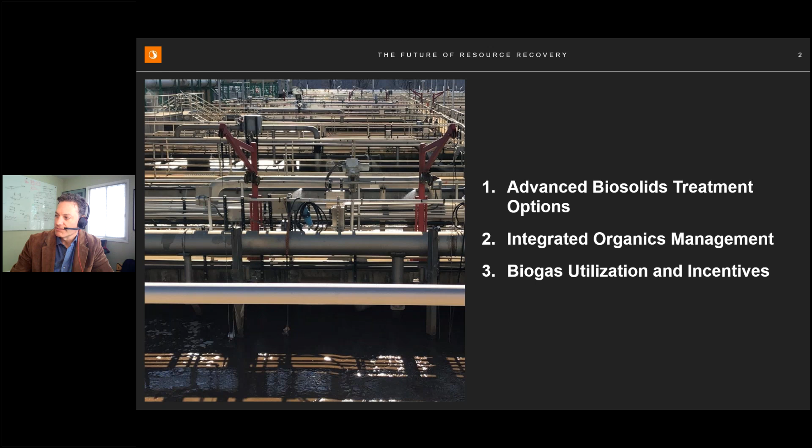I'll be presenting the first half of the presentation, and the topics I'll be covering include advanced biosolids treatment options, and then integrated organics management and biogas utilization and incentives market.

So I want to start off with some common objectives that we're seeing throughout our work on master planning and facility planning with utilities in North America and globally. One of those coincides with the topic of today's presentation: maximizing resource recovery.

And within the context of maximizing resource recovery, achieving Class A options and looking for diversified biosolids end-use options for sustainability. Many of these utilities that you all operate are decades old at this point.

There have been regulatory changes, capacity constraints, and many modifications have happened over the decades, and therefore there are space constraints, which is a common issue at these facilities. So trying to find space for new assets is typically challenging.

There's always the objective of ensuring that the end use, the effluent, is achieving the plan's effluent compliance, and ensuring there's an understanding of how the solid stream is impacting the liquid stream. Within that context, oftentimes we're looking at side stream treatment options to mitigate those impacts and ensure that effluent limits are complied with and the system is as efficient as possible.

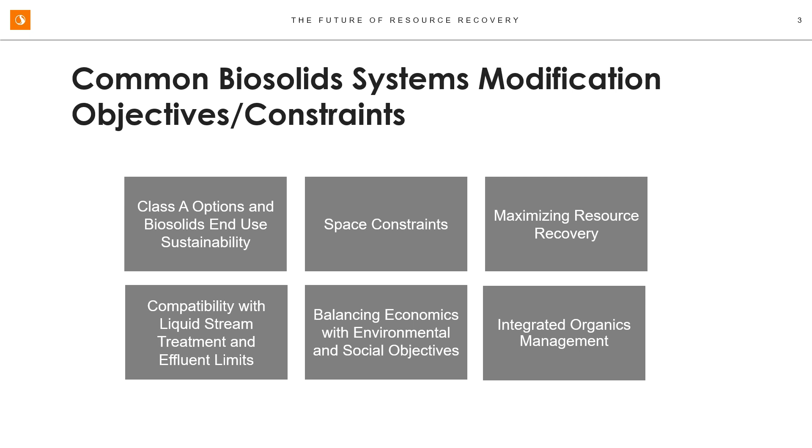In addition to that, looking at the green waste that can be combined downstream for bulking agent and so forth, for maximizing recovery of all organics.

About 12 years ago, I was involved in a Water Research Foundation study called 05-CTS-3 for waste solids reduction. At that time, there was a really healthy market in pretreatment technologies looking at ways of ensuring that we can minimize the waste activated sludge and overall sludge volume by hydrolyzing material upstream. In that competitive market, many of those technologies have survived, and some of them have waned a bit.

What's really come to the surface over the last few years in those pretreatment technologies is thermal hydrolysis technologies and thermochemical hydrolysis technologies like thermal alkaline treatment. All of the advanced anaerobic digestion technologies we're still seeing in play for various drivers, including thermophilic digestion, biological hydrolysis or acid gas phase digestion, post-aerobic digestion, and a lot of interest that I'll get into more here later on high solids anaerobic digestion, that is, intensification processes.

We're also looking at combination processes, like combining anaerobic digestion with thermal drying, composting, and thermal alkaline treatment downstream, which has become popular. We're seeing incineration processes still used and combined with anaerobic digestion. Post-thermal hydrolysis is something Cambi is working on now, along with emerging technologies like pyrolysis and gasification.

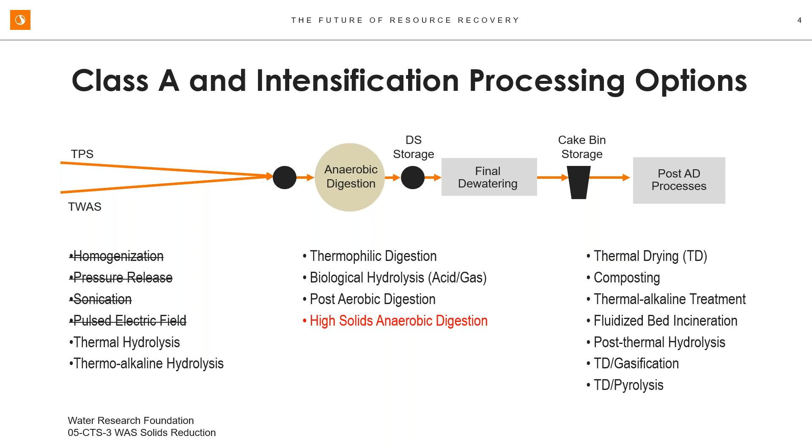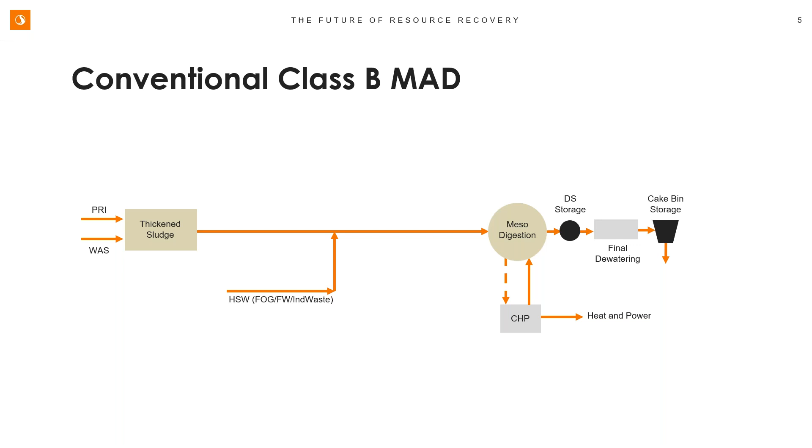Typically, a screening system is put in—a 6 millimeter screen or smaller—to get debris out of the sludge. A pre-dewatering step is required to get the sludge somewhere between 15 and 18% solids going into the thermal hydrolysis, to optimize the heat balance within that system.

Downstream of the thermal hydrolysis process, dilution water is added to ensure the TKN entering the digester is at an appropriate concentration to control the amount of ammonia in the digester itself. There's also a cooling step required—typically around 100 degrees Fahrenheit needs to be dropped from the system even after the dilution water is added.

The biogas can be used in a number of different ways, but if it's a combined heat and power system, the heat recovered needs to be converted to steam through a heat recovery steam generator to provide heat to the thermal hydrolysis system itself. This could require some supplemental fuel, depending on the type of CHP system and the overall heat demand.

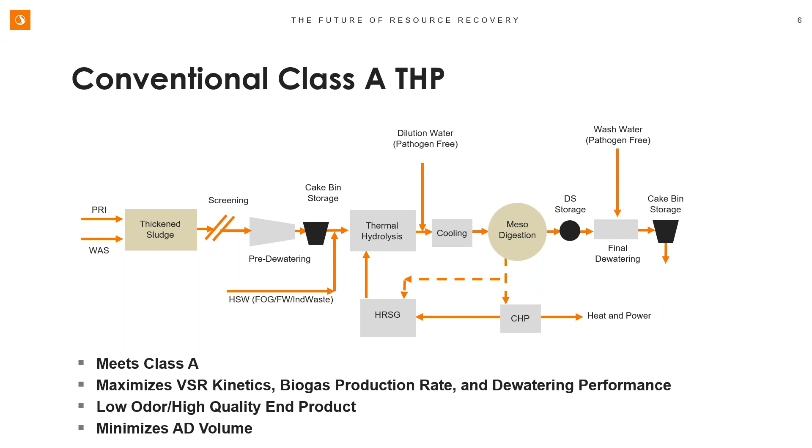The rate of biogas production is increased, and dewatering performance is significantly improved. We usually get somewhere around 28 to 30% dry solids from these systems, and the quality of the cake is very high—low odor and a very friable product. So it's a great process, but there's a lot going on with it.

As an intermediate step towards thermal hydrolysis, many facilities are simply looking at maintaining a Class B approach to biosolids management, but getting more out of the digestion system through intensification via high solids anaerobic digestion processes—taking the solids typically from 3 to 4% feed concentration up to 6 to 8%.

That can be done quite easily upstream, but sometimes you run into a viscosity issue getting that sludge into the digestion system itself. Chemical addition can be used to manage that. As I mentioned before, the alkalinity used in some of these processes does a nice job of reducing viscosity and potentially providing a hydrolyzing element to the process upstream. So that's one way to manage viscosity.

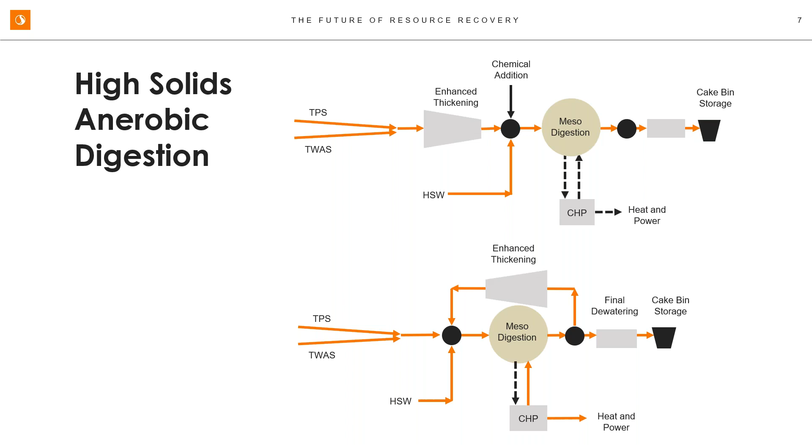Another way is through recuperative thickening, where you essentially decouple the solids retention time from the hydraulic retention time—recovering some of the digested solids, sending it through a thickening process, typically centrifuges, and back into the digester so you retain the solids. A nice aspect is you get a bit of a TKN ammonia purge out of that, so you can maintain a lower TKN concentration within the digestion system to avoid toxicity or inhibition.

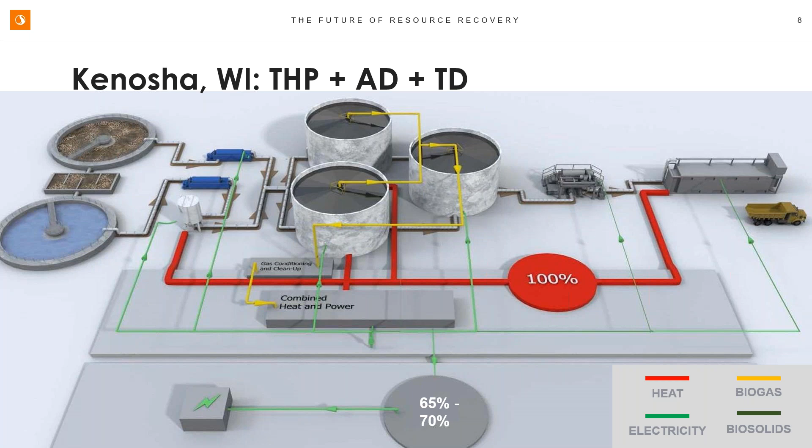Another project I was involved in several years ago is the Green Bay, Wisconsin R2E2 process, which includes anaerobic digestion, partial thermal drying, and fluidized bed incineration.

In this process, it's a heavy co-digestion system where imported industrial organic waste is combined with primary sludge, and thickened waste activated sludge goes to the anaerobic digestion system, then into a dewatering system. From the anaerobic digestion system, biogas goes to CHP for heat and power production, and the dewatered solids go to a thermal dryer. The thermal dryer recovers heat and supplies it to a pre-drying system to achieve autogenous combustion in the fluidized bed incinerator.

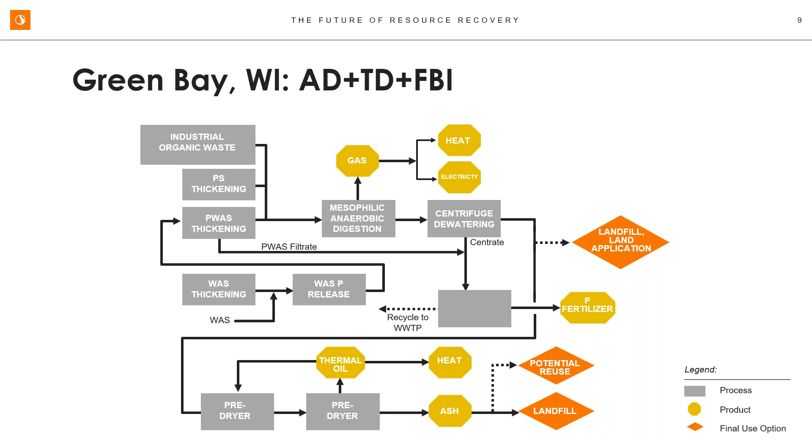It's a really innovative process. I'm impressed with that client and what they've done there.

This is an image of that facility. I was in charge of the pre-design of the anaerobic digesters you see on the right, and these are really state-of-the-art anaerobic digestion systems. They're silo-shaped units with a very high height to diameter ratio and a cone-shaped bottom, optimized for energy demand as well as energy production, and can be kept in service for a long period of time based on the shape, which keeps grit out of them.

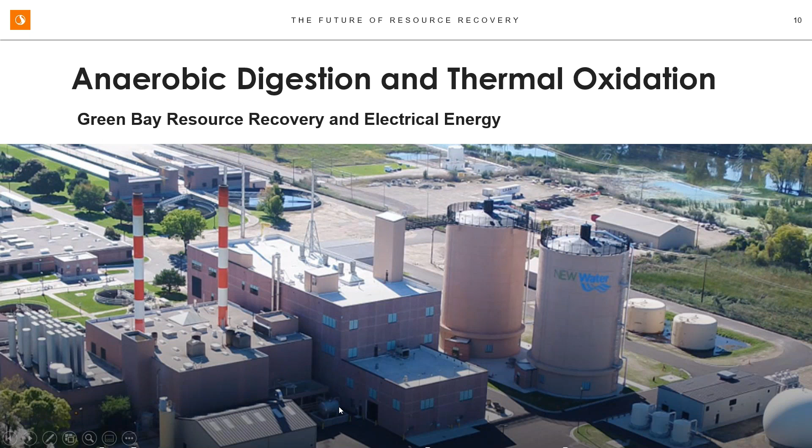In the center part of the diagram, you'll see the fluidized bed incineration system and the solids handling system itself.

Switching over to integrated organics management, as I said, there is a very strong trend in this. Some of it's regulatory driven, where, for example, in the state of California, for landfill diversion requirements, we're seeing a lot of co-digestion work going on in urban areas where landfill costs are becoming high, and the goals for renewable energy production as well as greenhouse gas reduction are driving this.

It's really the next step into the future of resource recovery, as far as I'm concerned, for facilities, municipalities, agencies, and districts that are looking to continue to improve on their resource recovery aspects.

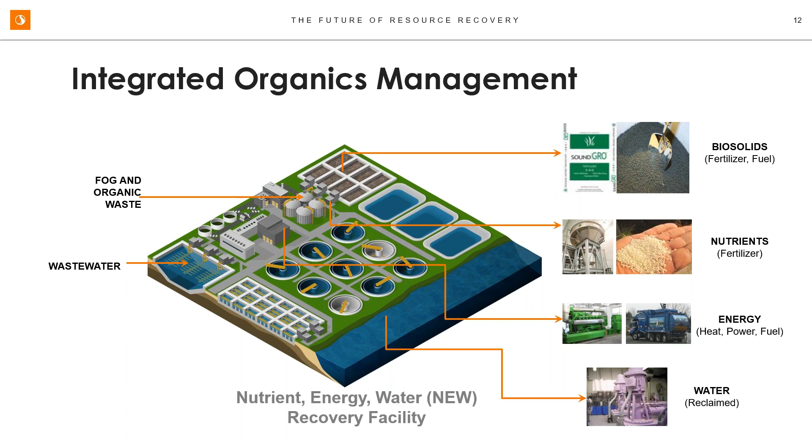Of course, this refinery in the middle is producing products at the end that include biosolids, nutrient recovery for fertilizer, energy production for vehicle and power production, as well as water recovery.

I've got several images here of these systems, and now what we're seeing is the evolution where pre-treatment systems for food waste are happening at material recovery facilities, really separate from the treatment facility. This is one example, I'd say a 1.0 version, of a separation magnetic metal removal system and screening system at the Central Marin Sanitation Agency.

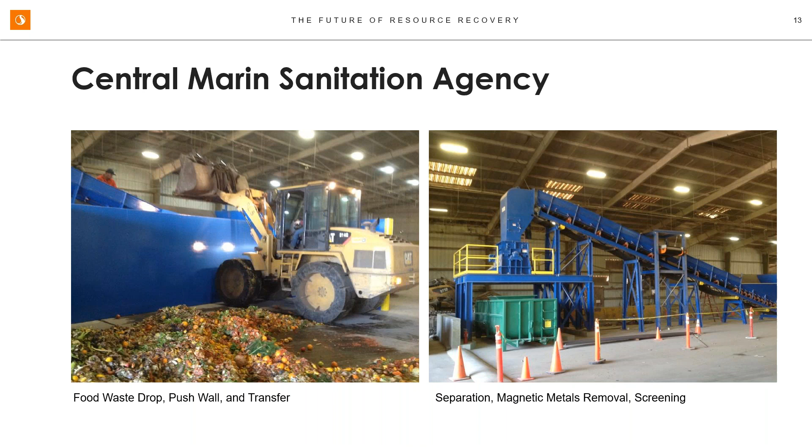It's just down the street from the treatment facility, so all the pre-processing of the material happens at this facility, and then it's transferred just down the street and injected into the anaerobic digestion system there.

This is another good example, the LA County Sanitation District in California. They have worked with third-party providers, but this particular system is something that LA County owns and operates themselves.

It's a screening system that has a series of sequential finer screens that create this bioslurry that you see over on the right.

The screening system is in the image on the left, and there are storage tanks from which the bioslurry is pumped into tanker trucks, and from the tanker trucks, that's transferred over to the treatment facility where it's co-digested with wastewater residuals.

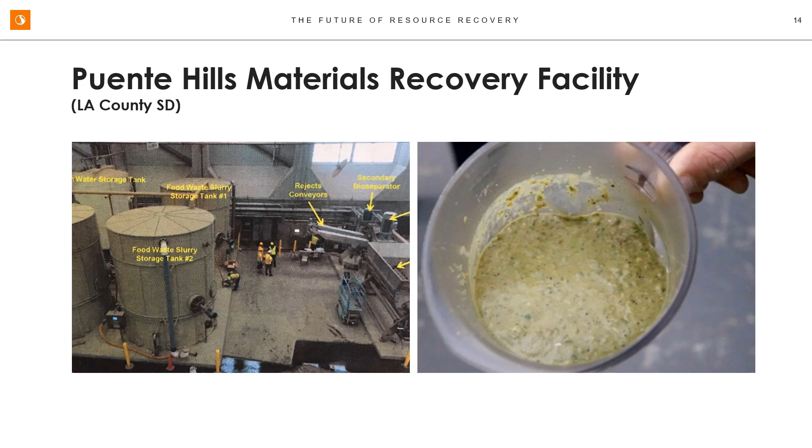The city of Edmonton has really been out ahead of this for a long period of time, and Stantec has had the pleasure of working with them on many projects, including one recently where we're the owner's agent on a wet digestion system, as they call it, which essentially includes...

a conventional digester as the wastewater market would see it, but it's for food waste or separated organic food waste that will be anaerobically digested. The biogas is planned to be used in a renewable natural gas system there, and residuals will be dewatered and reused in various aspects there.

It's a very nice system, and this shows images of their existing system with a dry anaerobic digestion system, combined heat and power, and the biogas storage and percolate recovery system in the lower left portion there.

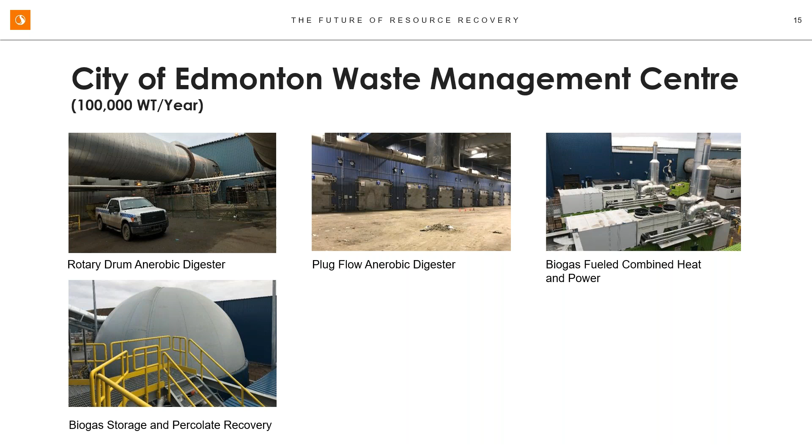Another good example is that Stantec is currently, through program management services, examining a fully integrated organic system for Atlanta Metro. This is a good example of what's happening in a lot of these urban areas where landfill capacity is limited, prices are going up, and there's a desire to do something beneficial with the residuals.

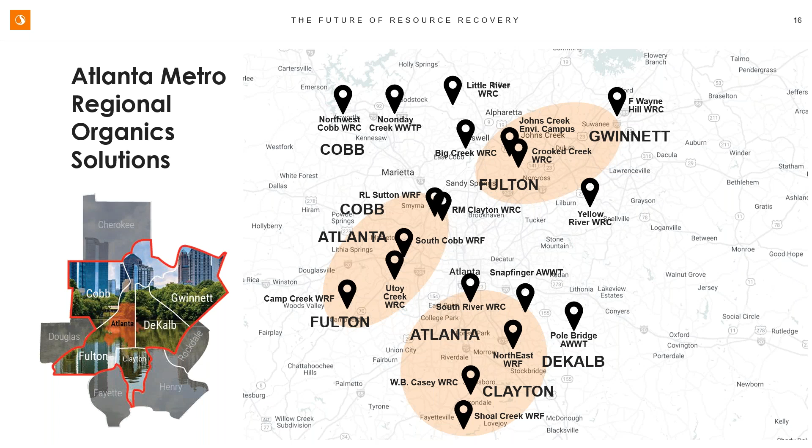So the city, led by the city of Atlanta themselves, along with accompanying counties and agencies associated with them, are looking at a regional facility that will co-process wastewater residuals with recovered organics from the municipal solid waste, as well as high-strength waste and fats, oils, and greases. Because of the magnitude of this facility, there are a number of different treatment options.

In the center portion there, we're looking at modifying one of the facilities to include a thermal hydrolysis system. This is really where the energy is going to be produced through thermal hydrolysis, anaerobic digestion, combined heat and power, and there'll be a solar project associated with this as well. So a lot of energy being produced at that particular facility.

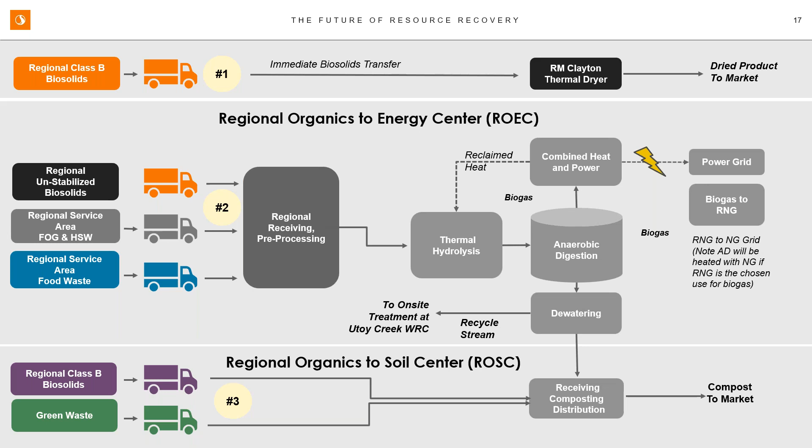Organics are planned to be recovered and transferred to a regional organics to soil center, where there'll be some composting of Class B material to upgrade that to Class A and have a diversified product.

The one thing that's very nice about this is that because of the diversification of the feedstock, as well as the treatment processes and the end products, it really provides a lot of flexibility to the management staff ultimately of what they can do with it.

So we'll have a whole bunch of different types of feedstocks coming in. Management staff will choose where that goes and where it can be optimized in anaerobic digestion, a drying system, and a composting system, and optimize that to meet the market demands on the back end with a thermally dry product, a hydrolyzed anaerobically digested product, and then a composted product. And those can be used independently or blended, and just a lot of flexibility there with that particular system.

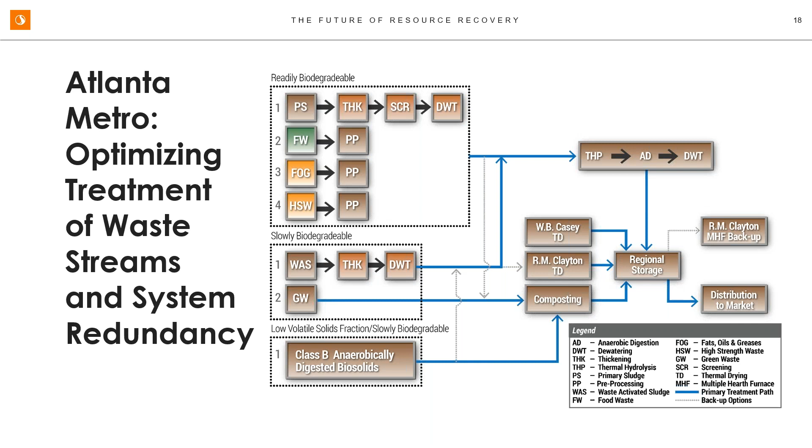Okay, last bit here is just on the biogas incentive market. We're seeing a lot of activity in the biogas incentive market now, and just want to give you a quick overview of that.

These incentive programs, biogas can come from wastewater facilities or publicly owned treatment works. They can come from private commercial entities that include dairy and food and beverage companies, and also biogas from solid waste.

Of course, that biogas can be upgraded to produce power and heat through a combined heat and power system. And also the CO2 can be removed so that it meets a natural gas grade quality, and that can be used for various demands.

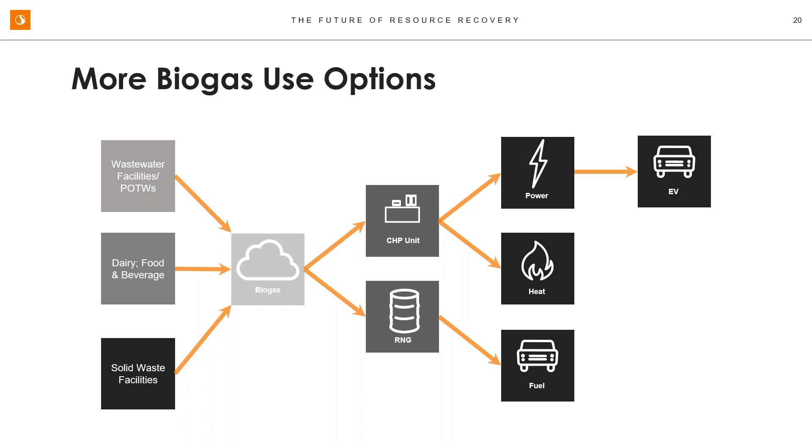For the incentive programs, though, in order to realize many of these credits, the fuel has to go to vehicles. So it either needs to go to an electric vehicle on the one hand, or it needs to go to a compressed natural gas vehicle on the other hand.

We are seeing the RIN programs through the Renewable Fuel Standard, as well as the California Low Carbon Fuel Standard, incentivizing this. Based on the current incentive market, when you add up all of these incentives together, as well as the wholesale value of natural gas to go to a natural gas vehicle, the incentives are quite high.

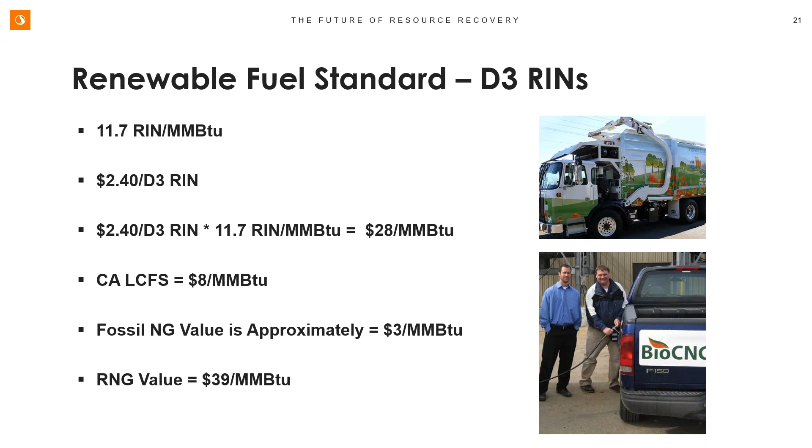We're estimating that if you're able to get all of that and get an offtake in California, you're able to realize up to $40 per million BTU, which is very, very attractive, and the payback periods are quite short for those programs. So there is a lot of activity there.

The challenge for some of these public entities with a fiduciary responsibility to their ratepayers is it comes down to really the risks and uncertainties around the market, and if the incentives are going to be sustained, or if they're going to change significantly to change the economics, and that becomes a bit of a challenge.

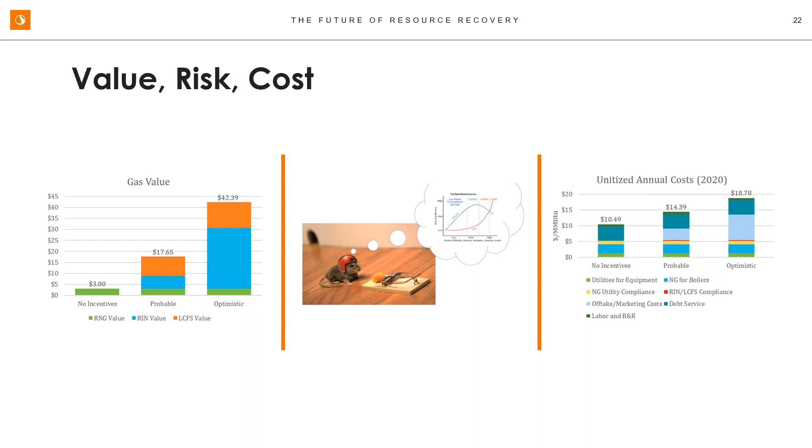So we have been working with many of our clients on really educating them on those programs and running risk analyses to determine how they want to go forward and the best use of that gas.

With that, I'm going to transfer it over to my friend Mehran, and I'll be happy to take questions at the end of the presentation.

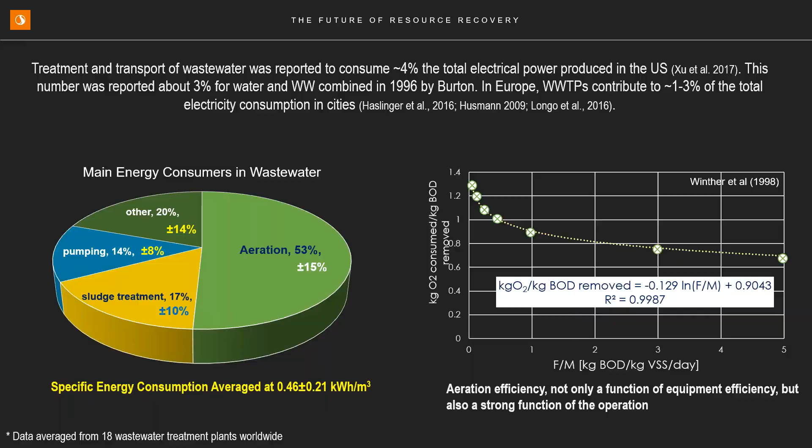Thank you. Thank you, Drew. I'm wondering if you guys can see my screen. We could there, Mehran. We just lost it. Now we're seeing your Outlook. Can you see it now? Nope, we're seeing your Outlook now. Okay, Outlook. Oh, sorry. There you go, and hit that presentation mode button. There you go, sir. Perfect.

Thanks. Thank you very much, Drew. Before I start, I'd like to thank my colleague, Dr. Yuan Fang, who did a lot of work on some of these slides here today.

In this presentation, I will share with you a simulation practice we conducted to measure the degree of energy conservation attainable at one of the largest plants in Calgary, which is Bonnybrook. Drew went through a lot of technologies in terms of the energy production and conservation, but in this case, I'm going to really talk on the specific case and see how really attainable that is in your own specific plants.

So we know that in general, a wastewater treatment plant is a very energy intensive process. We have to spend a lot of energy there. In addition to that, if you look at a plant from a circular economy perspective, wastewater and water treatment can consume a lot of electricity off the grid. In the U.S., it's reported up to 4% of total electrical power produced in the U.S.

That energy is consumed by water and wastewater treatment. In different countries, that number may change. In Europe, it's reported lower, between 1 to 3%, but that's still a significant amount of energy. So it's very essential to be cognizant about plant energy consumption and how we can push a plant toward more energy conservation, energy neutrality, and in some cases, energy positive.

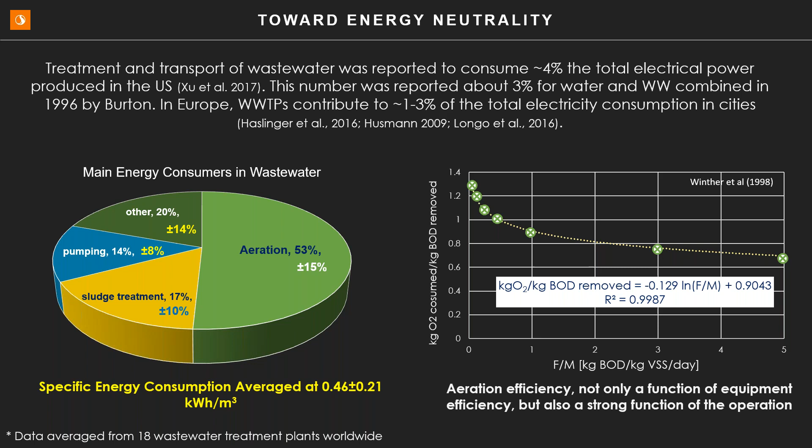One of the questions I'll have for the plant, maybe we can talk about in discussion, is how much you guys use in your plant.

The heart of energy neutrality, in my opinion, is carbon diversion—diverting the energy from the wastewater to the sidestream instead of sending it to secondary treatment, where we have to use a lot of energy from mechanical equipment and aeration. That itself has inefficiencies and energy loss, and whatever converts to CO2 is actually energy loss. On the other hand, whatever is really converted to biogas using CHP and even THP, as Dru mentioned, we can boost the amount of biogas.

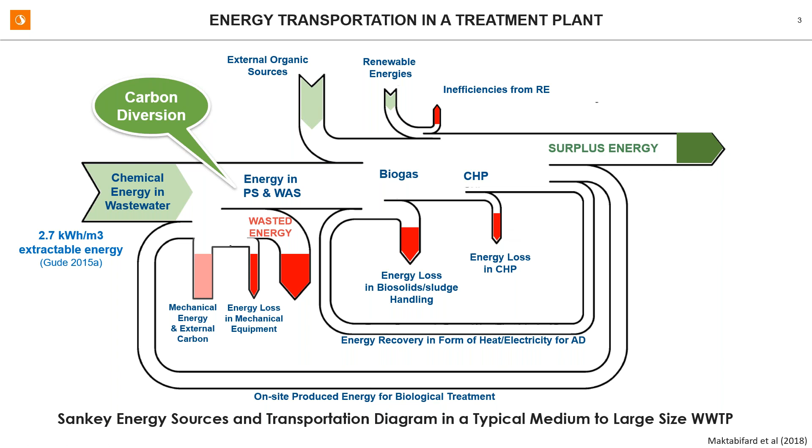So in practice, there's no single recommended scenario for a plant to become energy self-sufficient. However, there are ways to look into it. One is reducing energy consumption within secondary treatment—I'll talk about that a bit. Carbon diversion is a big part of it. Process intensification via advanced automation. There are two slides at the end I'd like to tackle on this.

Sidestream treatment is a very important part of energy neutrality—Dru talked a lot on that. Resource recovery itself helps reduce the load of secondary treatment, and obviously mechanical equipment efficiency matters too. No matter what we do, if we have a very inefficient aeration system, it's probably going to be very hard to go that way.

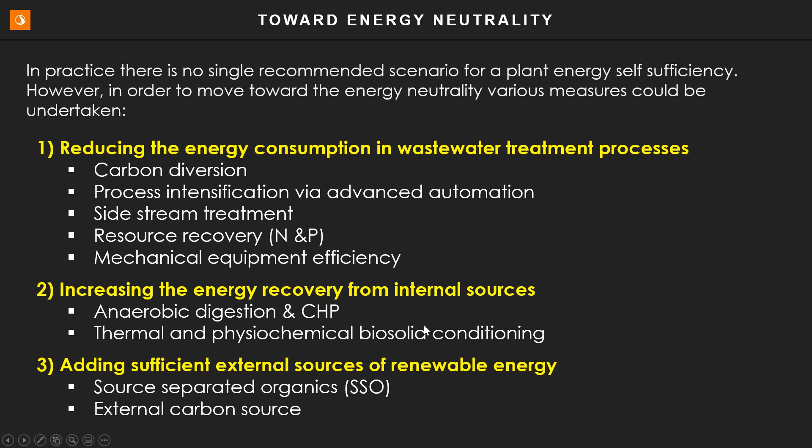Increasing the energy recovery from internal sources, how to boost the anaerobic digestibility by THP, and using CHP is a big part of the whole thing - thermal hydrolysis, and other emerging technologies such as pyrolysis that was mentioned earlier. In addition, an external carbon source will always add energy positive to a treatment plant. So let's talk about the Sidestream.

To go over the practice we did here for Bonnybrook, I'll use an example from one of the treatment plants in Maryland - WSSC in Maryland, which we designed. It comprised THP, anaerobic digestion, an equalization tank, a struvite facility, and deammonification. This diagram shows why we are using these different technologies.

We talked about THP for digestibility, obviously for energy recovery and solids rheology. One reason we use THP is to uniform and decrease the viscosity of the solids, and also through lysis we get a lot of purge of nitrogen and phosphorus, which boosts the energy, phosphorus and nitrogen concentration and resource recovery downstream.

After that, we have struvite recovery. I understand that Bonnybrook and specifically the City of Calgary is very interested in this technology. I listed a couple of different technologies used here: PHOSPAQ, Pearl, MagPrex. These are the technologies we used for comparative evaluation for WSSC, for nutrient recovery, struvite mitigation, and load mitigation.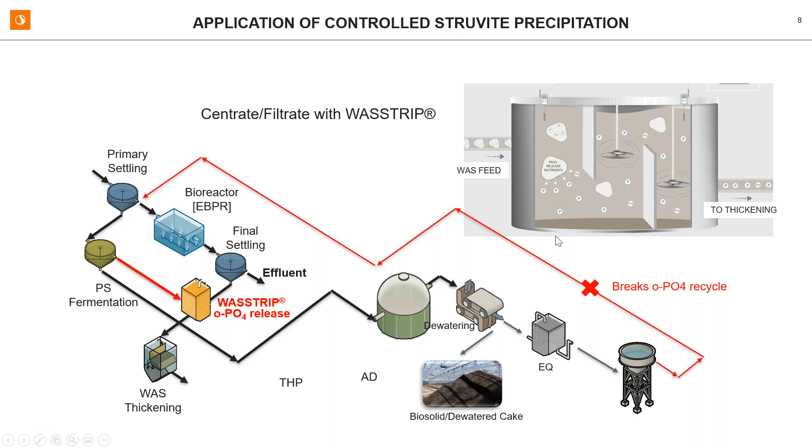That results in even more recovery of phosphorus, and as a result nitrogen, in the struvite process, which further reduces the amount of nitrogen that goes to the head of the plant, and for that we spend a lot of energy. This graph shows the performance of the WASSTRIP based on hydraulic retention time. It shows that close to 8 hours is the adequate hydraulic retention time when we can maximize the release of phosphate and other cations, magnesium and potassium, in the WASSTRIP process before we implement a resource recovery facility such as MagPrex and Pearl that I talked about.

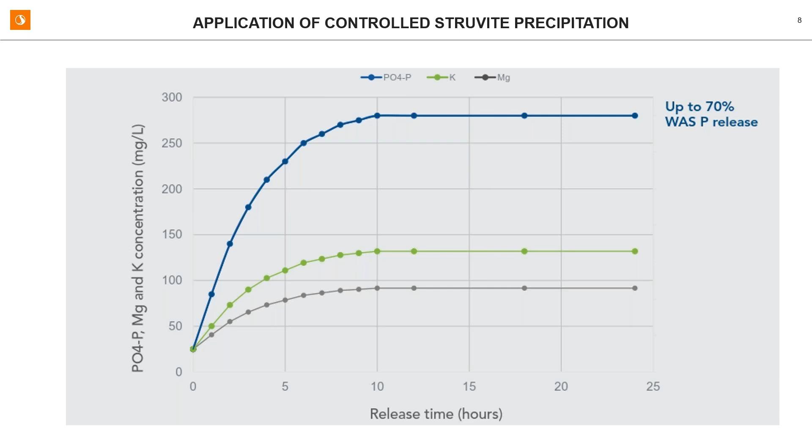MagPrex is another technology that comes on the digested sludge. We actually designed and installed the largest MagPrex facility in Denver, and that is on the digested sludge.

The reactor is going to be placed between the anaerobic digester and the dewatering sludge. Instead of injecting alkalinity directly, they provide higher pH values in order to fall into the KSP of precipitation of the struvite. They use aeration to strip CO2. When you strip CO2, obviously the pH goes up, and the precipitation of the struvite happens.

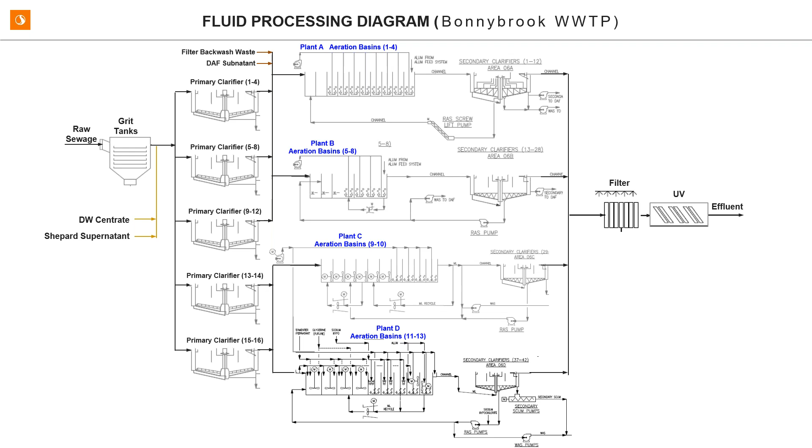When we look at the process itself, we know that we have plant A, B, C, and D. There are some differences in the configuration. For this analysis, we used plant D, which is the most recent plant under design and commissioning, and we compared how much we can save energy for plant D if we implement these strategies. The assumption was that whatever result we get is probably going to be pessimistic compared to A, B, and C, where we can even save more energy.

This table shows the influent characteristics and flow compared to the dewatered centrate and Shepard Lagoon supernatant that goes to the head of the plant, as shown in the previous flow chart. We see that although just 1.8% of the overall flow is the recycled flow, 12% of the entire solids going to the second treatment at the plant come from the centrate and recycled flow in general and Shepard.

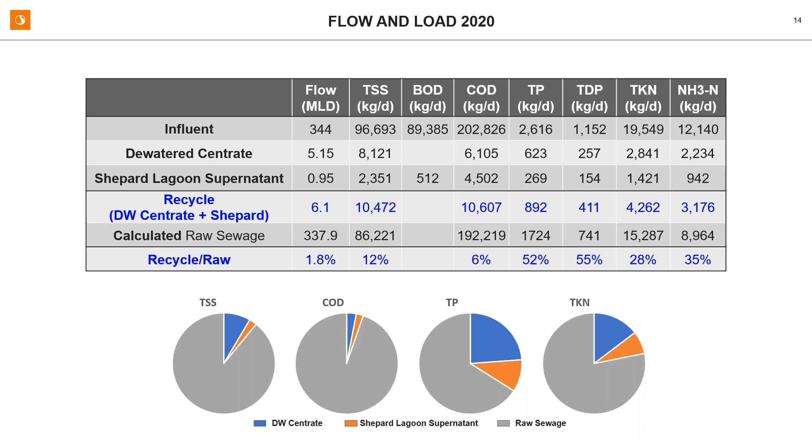But if we look at the phosphorus and TKN, this number is actually very significant. Total phosphorus 52%, TKN 28%, and ammonia 35%. That really shows how important it would be to implement a proper sidestream treatment, not only to recover the resources and leverage energy production, but to decrease the load of nutrient going to the secondary treatment by a very meaningful degree.

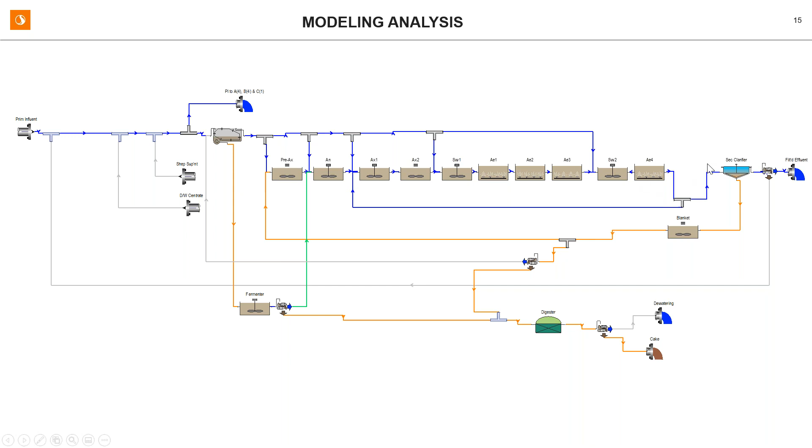This is the model that we use. It's a calibrated BioWin model, a steady state model. That's for plant D, and we basically assume if we implement all those changes in the sidestream, how that really impacts the effluent, the performance of the secondary treatment, the energy consumption in plant D, as well as the effluent quality, and we compare it with the existing data today.

The first modeling we did was the impact of THP on the anaerobic digester. This is the anaerobic digester performance in the last few years at Bonnybrook plant. We had around 53.8% VSR and TSS percent of 4.1% going to 2.3%. The digested gas we got in the modeling was slightly different than the data, but we used it as a base model. We implemented THP, and I want to draw your attention to some of this point. You see that the TSS percentile is going to go down in the effluent to 1.9%, but the VSS to TSS will change from almost 67% to 60%.

The orthophosphate will increase significantly. The ammonia will increase significantly, and we're going to have around a 20% increase in the biogas. In addition to the benefit we get on the rheology of the biosolids, we're going to boost the resource recovery potential and the biogas potential of the plant.

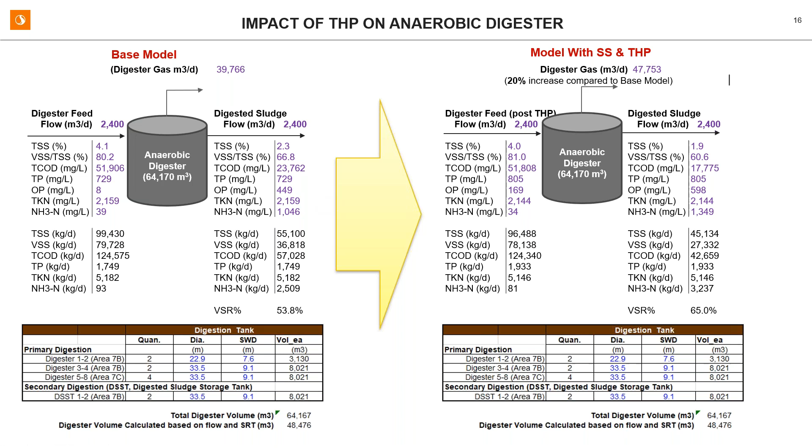This graph shows the comparison between three different scenarios: the existing scenario, where the recirculation is 34% of the total phosphorus going to the plant and TKN is 22%. When we have the sidestream treatment, which is the deammonification and the struvite recovery, it shows that we reduce the orthophosphate recirculating back to the head of the plant by 80% and ammonia by 90%. That is basically a decrease in the total load reduction of TKN by 15% and total phosphorus load reduction by 13%.

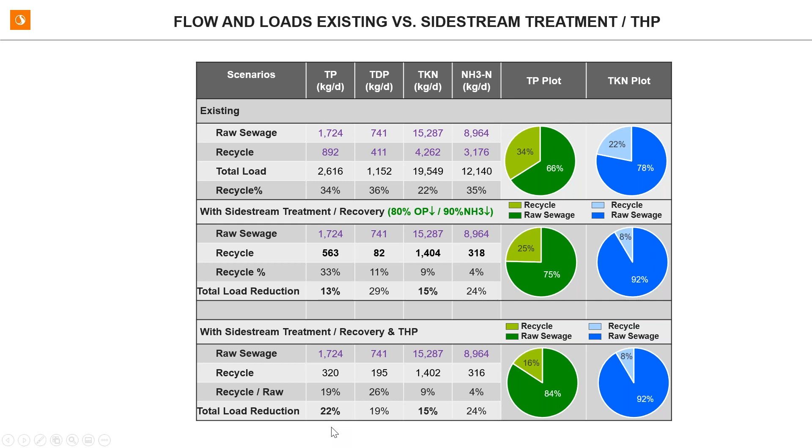If you implement THP in addition to the additional biogas we get, the most benefit on the nutrient side would be on the ammonia and the phosphorus side. We see that the total reduction even will increase from 13% to 22%. That is significant on the secondary treatment.

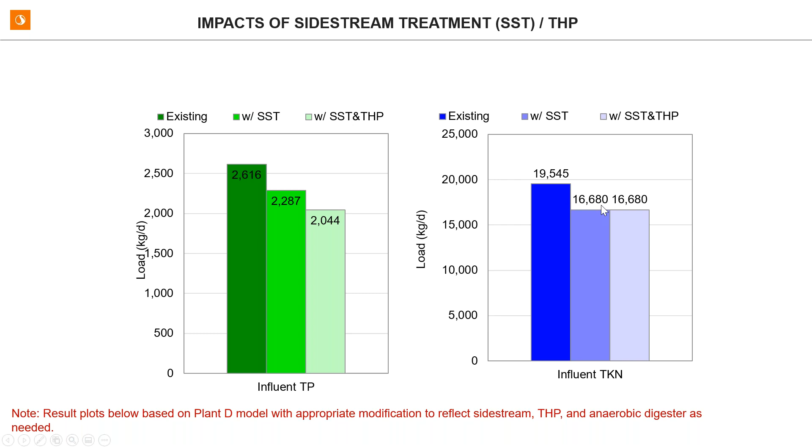This is the impact of sidestream treatment on the load. As I said, in the graph, from 2,600 kilograms per day of phosphorus going to the plant, by implementing the sidestream treatment as well as resource recovery we can go down to 2,200, and further down implementing THP to 2,000. The very same thing can be observed on the nitrogen side. We see from 19,500 we go down to 16,700 on the secondary treatment.

This is the simulated effluent quality on the total effluent, the effluent TP, the effluent total nitrogen, as well as the air flow requirements in plant D and the digester biogas flow. I want to mention that the 2.5 milligram phosphorus figure assumes that we are not, at this point, using any chemical precipitation in practice. We see that by implementing the sidestream treatment, we can decrease this 2.5 milligram in the effluent in plant D to as low as 0.8 and 0.6, based on resource recovery and deammonification, as well as THP in the system.

The effluent total nitrogen will have a significant improvement upon implementing the sidestream, decreasing the total nitrogen effluent from 17 to 11.9. In terms of the aeration requirement, it shows we achieved a 15% reduction in aeration and 20% more biogas production via the implementation of THP before the anaerobic digester. So by implementing a 15% reduction in the main secondary treatment and 20% extra biogas, this is a significant step toward energy conservation.

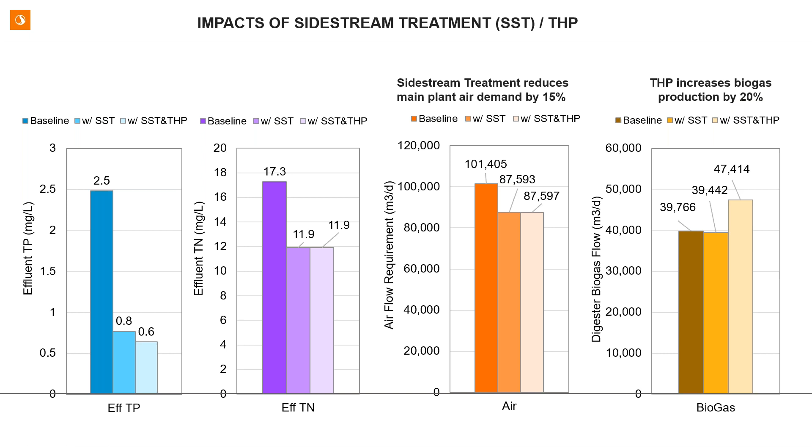But in a lot of cases, we do not really have the leverage of sidestream treatment, and in some cases we have to take different approaches in order to really go toward energy conservation. The main focus would be on the secondary treatment itself, and that pretty much depends on the compliance limits that we are exposed to.

This is the compliance limit for the Bonnybrook. It shows that when it comes especially to ammonia, it's not as tight as a lot of places where we have to deal with total nitrogen effluent of 2-3 milligram per liter, total phosphorus of 0.1 milligram per liter.

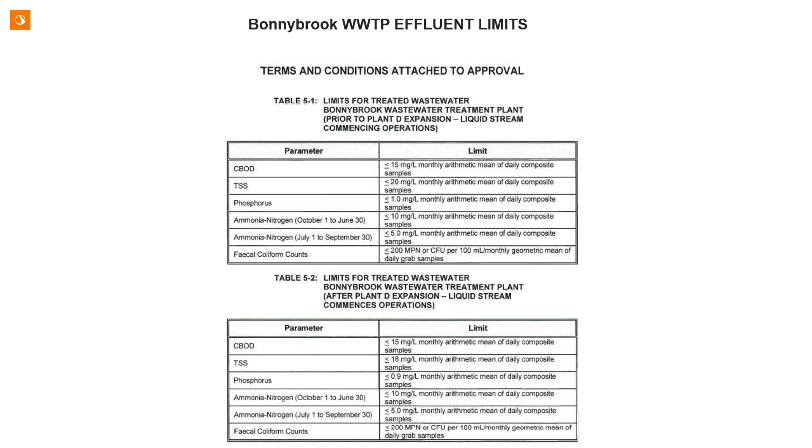In this case, we can take other approaches. I really want to mention this relatively new approach that's been showcased in a couple of full-scale plants: ammonia versus NOx aeration technology, which compares ammonia versus nitrate to intensify the process by promoting SND through the secondary treatment.

If I go through this quickly, it shows that when we have a very big aerobic zone, obviously the ammonia goes all the way to zero. When we increase the anoxic zone in a treatment plant, the nitrate goes lower, and there is a point where the combination of nitrate and ammonia is the lowest.

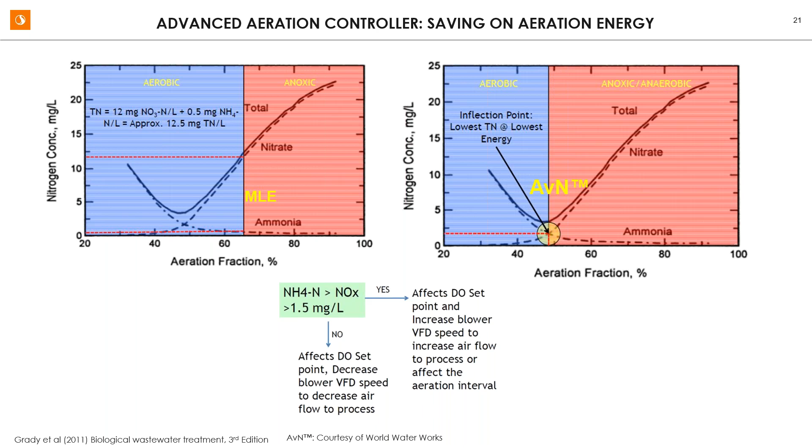That's exactly the point we use for the advanced automation. We just nitrify as much as is needed. When the ammonia is above NOx, we start aerating, and when it's below NOx, we stop aerating. That would be the type of DO you have in the system instead of a continuous DO of 1.5 or 2, or whatever ammonia-based control says. This is a kind of intermittent aeration.

In one of the treatment plants where this strategy was implemented, they were able to save 25% on the energy side without really compromising the effluent quality. That happened in Florida, where the temperature was higher, obviously. Every study, every case, every utility is different, and it has to be tuned. But this is a very good

technology in order to intensify the process and reduce the energy demand, and that could be implemented either with the sidestream, or even in some cases where plants don't have the benefit of a sidestream, as a means of energy management in the secondary treatment.

So in summary, implementing THP, AD, CHP, resource recovery and sidestream deammonification process reduces energy consumption by increasing produced biogas and reducing the nutrient load to the mainstream by a great degree. THP itself adds to biogas production by 20%, which is significant. And sidestream deammonification is a very effective way of intensifying the treatment itself by reducing the nitrogen and phosphorus going back to the head of the plant.

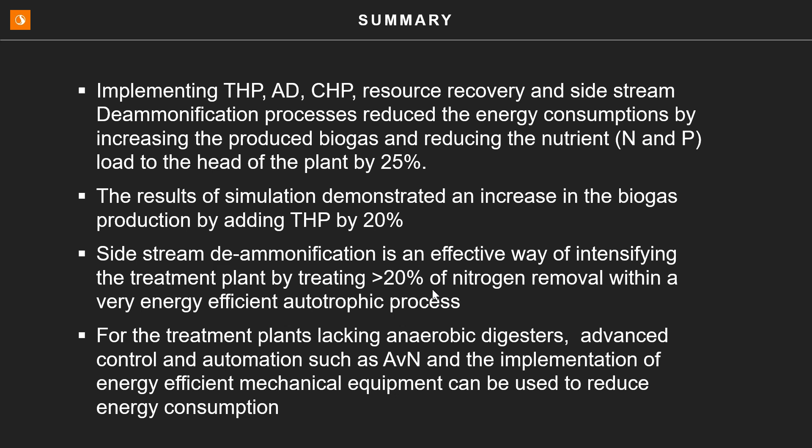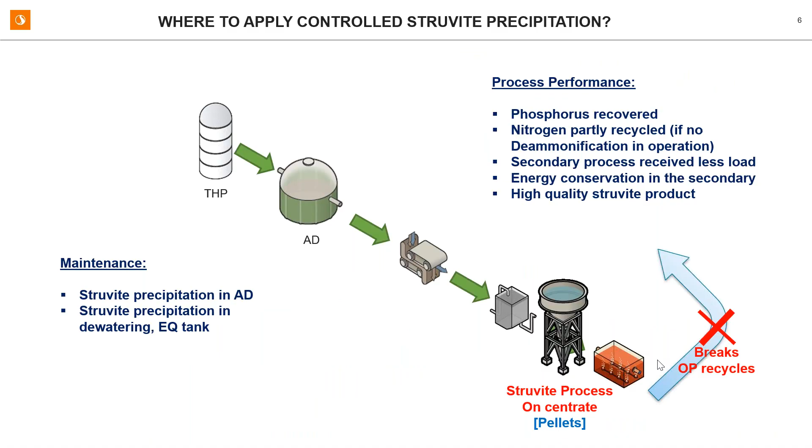Is deammonification the front-runner technology for sidestream treatment? Yes, deammonification is basically a general name for all of them. As I mentioned, there are different technologies, but I didn't go over them for the sake of time. Here we analyzed the comparison between ANITA Mox, DEMON, and AnammoPAQ - these are the 3 main technologies with the most installations. There are 2 newer technologies called AMX and ZeeNAMMAX, basically by Tomorrow Water and by Suez, very much based on MABR technology. You may be familiar with it, but these are still at pilot scale. We have 3 technologies at least with multiple full-scale installations, both in North America and around the world, all called deammonification. In this case, what we did was the Hybas ANITA Mox process.

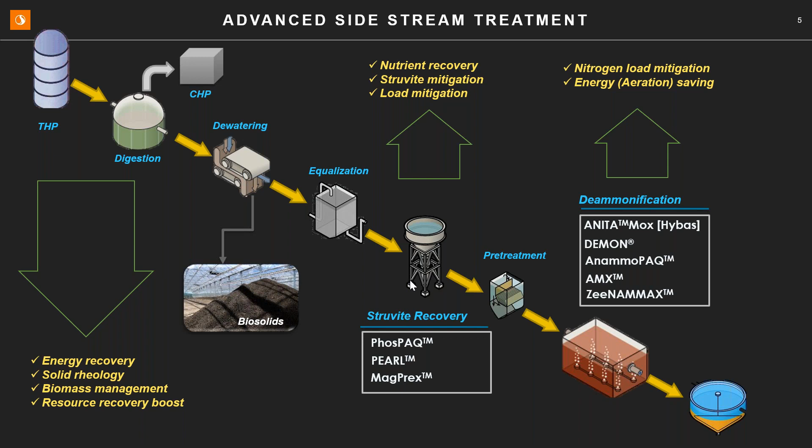Without co-digestion, what's the maximum boost you can get in biogas with hydrolysis? It's going to be really site-specific, dependent on the size and loading rate of the digester. Hydrolyzing primary sludge isn't going to give you much of a boost, but hydrolyzing the biological sludge or waste activated sludge has shown to make it significantly more biodegradable in the anaerobic system downstream, especially - and this is an important differentiator - when the existing SRT in the system is 20 days or less. If you're running a very long SRT, say 30 days plus, and you implement a pretreatment process like thermal hydrolysis, you're probably not going to see a big increase in VSR and biogas production.

Now, if you're running a short SRT - something maybe 20 days or less - and you implement THP, you're going to see probably much more of a significant benefit. We typically plan on maybe a 20% bump in VSR in the WAS. So if it's a 50-50 loading rate on WAS and primary sludge, you might see an overall 10% benefit on the VSR and biogas production. That's typically what we plan on, a modest increase. When you combine it with the other benefits is really where you start to see more bang for the buck on handling costs downstream due to better dewaterability and better reuse options downstream.